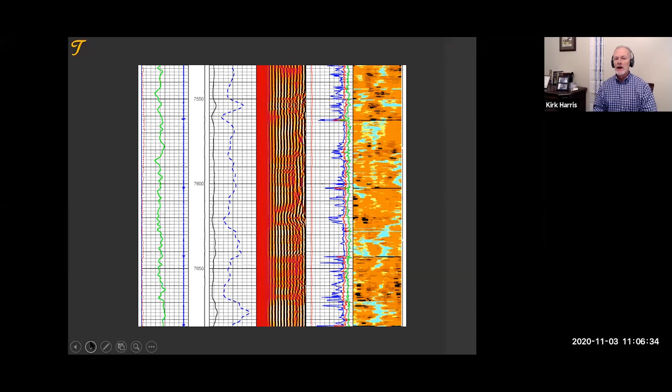We're going to talk about the bond log and the ultrasonic, both. We'll save the ultrasonic for next week. This is a combination bond log and ultrasonic. Bond log on the left, the colorful map we'll look at next week. We're going to focus on this, the CBL.

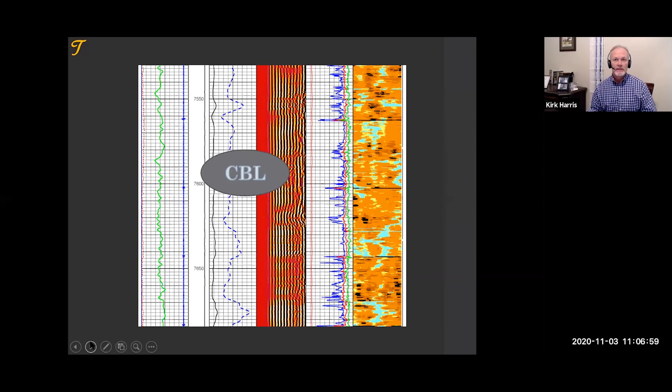And as you look at that, I don't know if this is your first webinar on bond logs or if you've attended others, but the bond log is a simple log. Five curves, easy to understand. To interpret them, we'll look at, is a little more tricky.

This is the purpose, this is the reason that we're learning about bond logs. Someday, if you're in upstream oil, you will find yourself gathered around a bond log. This happens to be a school I was teaching a few years ago in Colombia, but you will gather around the log with drilling, with production, with supervisors, with managers, engineers, geologists. Almost every position in the oil field upstream will touch that bond log.

As we abandon wells, I look at many bond logs to assure that we have a secure abandonment, a well that has integrity as we abandon the well using the bond log. So I hope that you get the opportunity to be gathered around the bond log and watch the dynamic that occurs, because people will be arguing, people will be talking, it will be noisy, and you may be in a position to be able to help interpret that log, or even to take a leadership role in being the go-to person for your company for bond logs.

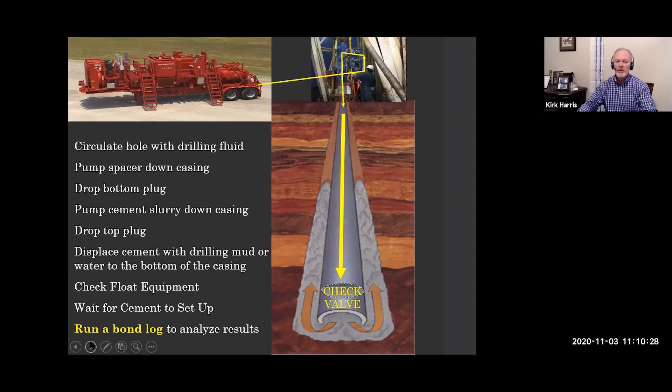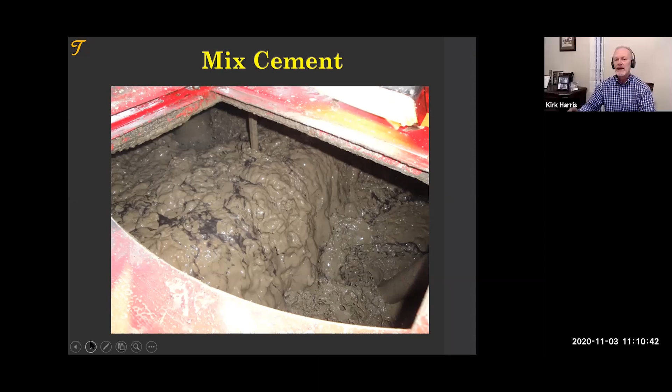At the bottom of the casing, there is a check valve. We call it float equipment to keep the cement from coming back inside the casing. We then wait for the cement to set up and run a bond log. So we mix the cement, beautiful gray cement. Here we're mixing it. It's being mixed on the left side of this tub, being poured over into the right side of the tub, where we'll then let it go to the high pressure pump and pump it down hole.

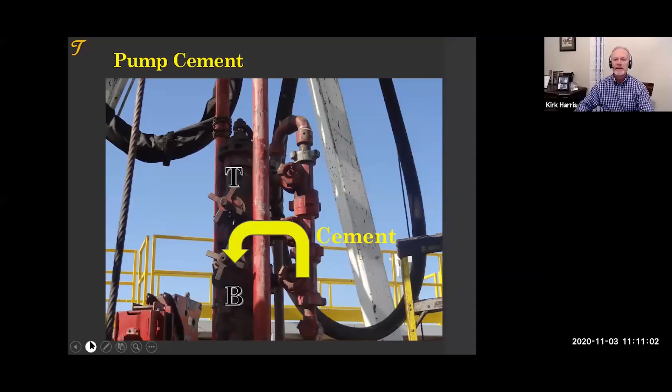On top of a bottom plug B, through a cementing head, we're going to pump that cement on top of that plug, then drop the top plug T on top of the cement and displace it with liquid. There we're taking returns, going down the casing, up the annulus.

What do we do next? What's the next thing we do? We've pumped the cement through the casing. Hopefully it's made it to the outside of the casing, has been lifted up, covering our zones to cause isolation so that the oil and gas doesn't come up to surface or come up to a previous or another formation, such as a freshwater formation.

What do we do next? One of the favorite things I like to do. We sit back, we relax, we pour our coffee, and we wait. We wait. While we wait, the cement is setting up. We're then getting ready to run the bond log. We're going to wait 24 to 48 hours for the bond log.

At the end of this session today, we're going to talk about some disasters that have occurred, including Macondo. And for Macondo, we did not run a bond log because if we were going to wait 24 hours, that's $500,000 of waiting time before we can run the bond log. So the bond log costs money, but the waiting costs money as well, as it is on the critical path sometimes. And so sometimes we have to design the cement to set up faster to be able to run a bond log sooner.

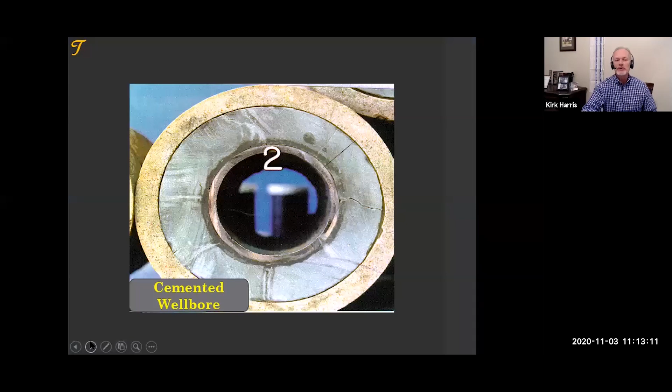And at the end, we have a cemented well bore. We have the formation, the cement fluid, which becomes part of the well bore. So let's look at the tool that we're going to run inside of this well bore.

And it's kind of interesting because I don't know if you've ever thought about it. Sometimes I think about things in the oil field that probably I shouldn't be thinking about or no one else thinks about. I imagine going down the well. Does anyone ever imagine that? That I'm going to take a trip down the well bore, a couple miles. Can you imagine how quiet it is down there if you're just sitting down there? I've been inside a cave before, only 100 feet into the cave, and it was dark and it was quiet.

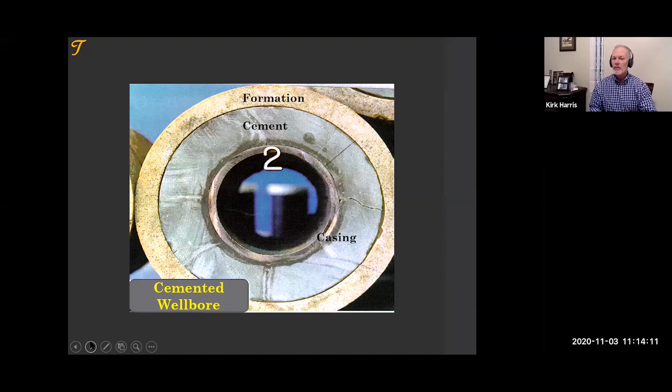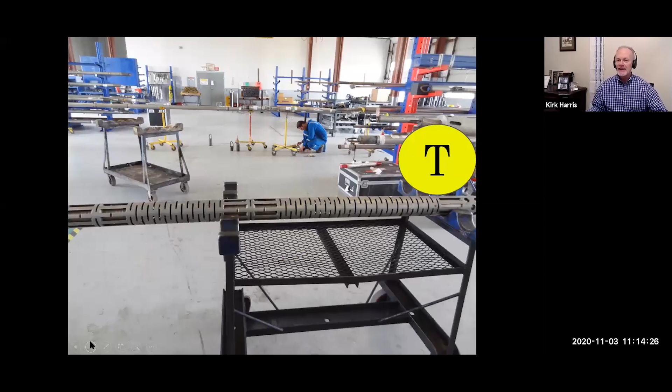Well, it's very quiet, and we're going to run a tool down there and start making some noise. And when we run that tool, this is the tool, we're going to make that noise with a transmitter for the bond log that is making an audible sound. The sound that it makes is a clicking sound. Very rapid. And we're listening for that sound 3 feet away and 5 feet away. And we're listening for how loud that sound is. And when do those sounds arrive? And after we hear the first sound, what other sounds are we hearing?

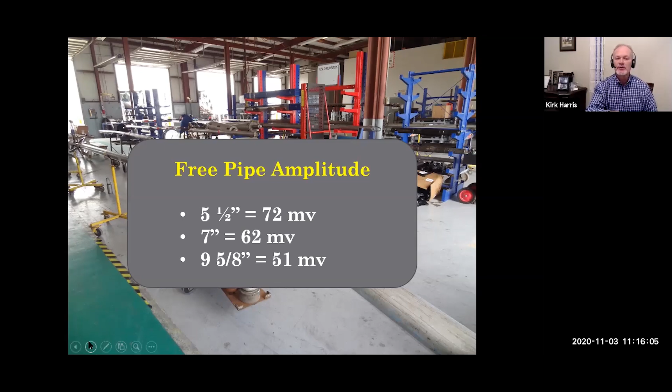Let me take a look back here. This is inside the shop of a logging company. And I've kind of hidden what I want to show you here, but behind this screen that you see is a test cell where we will run that tool that we just saw, and we will measure. Here we go. And we will measure how loud the tool is in there, and different companies do it differently. Some companies will run it in this chamber and they will just make sure that the tool is working, that it functions. Others will calibrate this tool and they will listen to see how loud it is in pipe that is not cemented. And we get various free pipe amplitudes when we sound that tool off.

The problem with the bond log tool, we go down the well, it's very quiet. We send out sound waves and we start listening for echoes. If we're in the open hole, no casing, no cement, open hole sonic logs, the sound goes out, it reflects off of the boundary, which is the formation, and comes back. We get a nice clean sound wave coming back.

When we put casing into the well bore, as the sound wave goes and it hits the casing, whatever's on the other side, if it's a solid, the sound wave passes through. But if it's liquid or it's poorly bonded, then it reflects back and starts to echo. So when you put casing in the well, it's like going into a tunnel that is made of a big piece of steel. You start shouting, you start getting echoes. And these echoes start reflecting and make the bond log a little confusing.

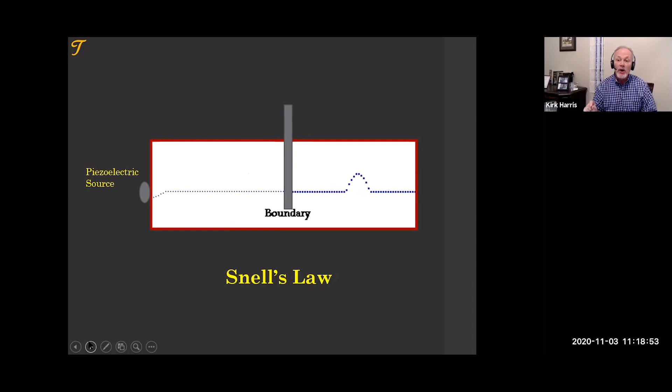So when I have loud ring or high amplitude or loud sounds coming down the casing, I have no cement. If it's a small sound, all of my energy has gone out. The small sound coming down the casing means I do have cement. So when I have cement, I send that sound wave out. It goes through the casing, through the cement, reflects off of the formation.

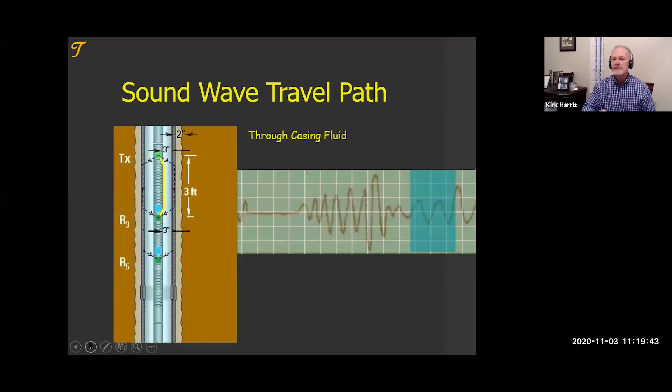Again, the first part of the sound wave that I sent out, that's going to arrive at the 3-foot receiver first. The first part of that wave is traveling through the casing. It's moving fast, so it arrives first. The second is going through the cement and formation. And the third part of the curve is coming down alongside the tool inside the logging fluid.

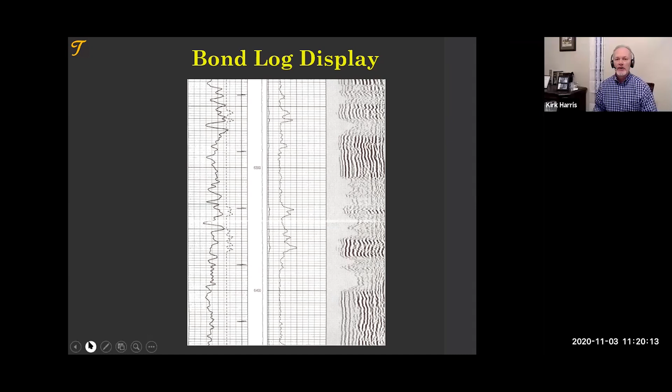The middle line there, the dark line, is the transit time. It is telling us from when I click, when I hit the transmitter, to when I receive the signal. This transmitter is being fed electricity through electric wire line. When the electricity hits the transducer, it causes the transducer to contract and sends out a pulse, 20 kilohertz in frequency, a sound that you can hear if you have good ears. And when it goes out, the time it takes to get to the 3-foot receiver is the transit time.

The casing collar locator is the hashed line. It tells us where the pipes are jointed together. It's that extra massive steel. It's basically a magnet telling us where the large steel volume is at the joints. The middle curve, and I will warn you, at Therabond, we are very hesitant to spend too much time looking at the amplitude curve. This is basically how loud is that sound, that first sound we hear at the 3-foot receiver coming through the casing. How loud is that?

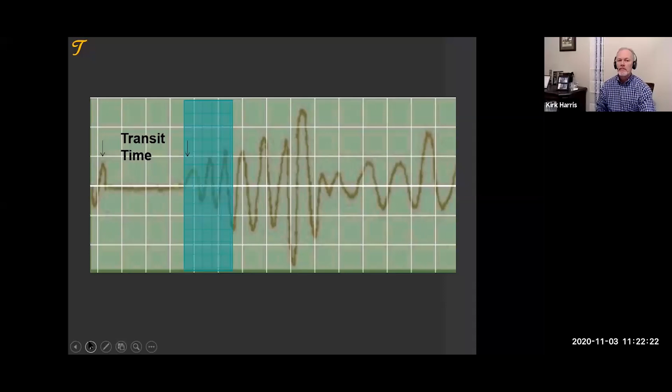And then we have the variable density log to the right. That's the 5th curve. That is the history of the sound wave. Time versus depth to when I receive it. The amplitude is the height or loudness of that first wave that arrives. In this case, it's fairly small. The big peaks coming later, those are big sounds reflecting off of the formation. But that first area is coming through the casing. That first peak is the amplitude.

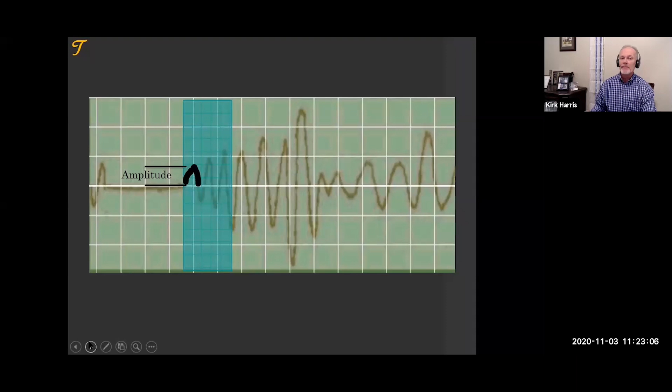I will repeat, at Therabond, we do not use amplitude specifically to interpret the log. We will read the log for the CBL. And we will be looking at several things on the variable density log that we will observe when we interpret the log. But we take the variable density log. I'll show you how we make it. We cut it in half. It's like being in the ocean at sea level and watching one wave go by. The height of that wave is the amplitude. We take that.

We're going to cut that wave in half, rise out of the ocean, and look down on that wave. And when we do, it would look like this. And now we'll do that as we go along the beach of the waves coming in. We will mark the peaks of all of those waves, and we will connect them to create the VDL. Again, it's like flying over the ocean now, looking up and down the beach, that's our depth, and looking at the first arrival that's hitting the receiver, a history of the waves that are about to come in and be picked up on that receiver. So every time you fly over the beach, you're looking at a VDL.

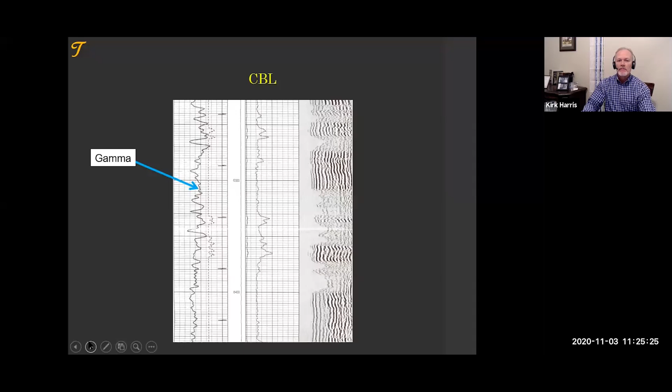When we look at the CBL, we'll see it to the far right, 5 curves. You get the gamma, the dotted line in the middle is the transit time, 3-foot receiver. The hashed line is the casing collar locator. The middle area, we have 2 curves. They're the same curve, different scales. This is measured in electrical energy.

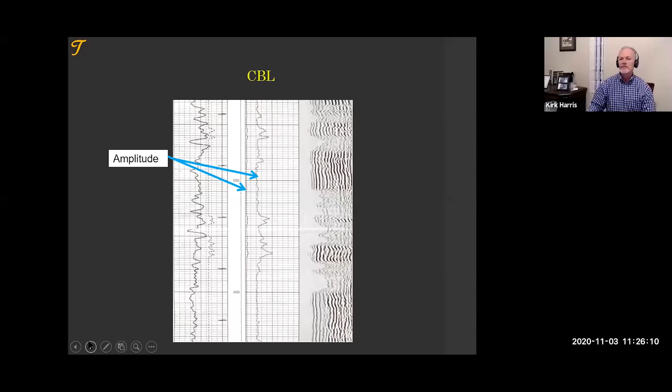It's the amplitude. This particular log, and it changes from log to log, this particular log from 0 to 100 millivolts. And then we have another curve, the amplified amplitude, 0 to 10 millivolts. And then we have the VDL, the variable density log. And that's where we'll have our focus when we interpret our bond log.

When we look at that, the first part of the wave, the first wave hitting the beach, is the fastest sound and that fastest path, and that fastest path is traveling down the casing. In this area, we look for straight lines because it would be a lot of energy, and since it's coming down the casing, it's homogeneous.

Always, if our tool is centralized, we get the same fluid, the same casing, the same fluid. The wave should arrive at the same time up and down the well, and we'll see straight lines. In this case, it's a perfectly cemented well, so the lines disappear. There are no straight lines. And a basic rule, if you see straight lines, that's bad.

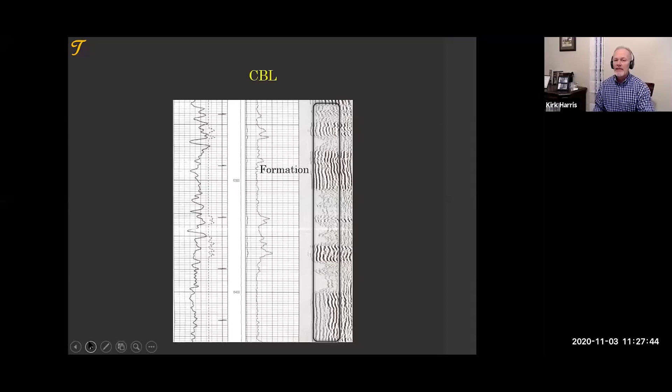Straight lines are energy coming down the casing. Straight lines are the same as a loud casing ring. When you see no lines, the energy is so small we can barely pick it up because it's very quiet sound. The middle part of the curve comes through the formation, big formation signals. And then the last part, we'll see effects coming through the fluid. All of these waves coming in, and the construction and destruction of these waves as they come in show up

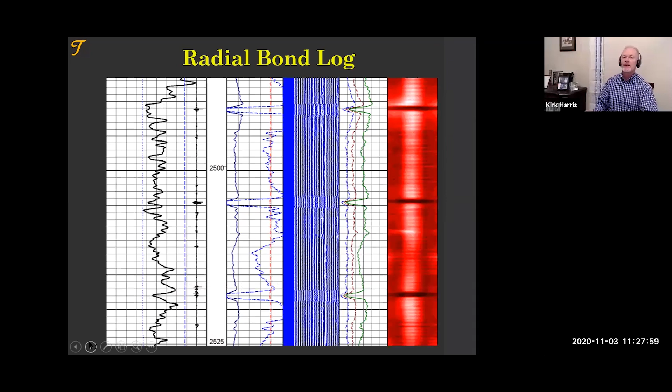in the VDL. Very quickly, you're going to see some colored maps today, and those are from radial bond logs, where we have the regular cement bond log, 5 curves. We add to that a cement map. That's based on 8 separate receivers, either at the 2-foot or 3-foot interval. By the way, the VDL comes from the 5-foot receiver that we saw earlier. The cement map will come from radial receivers listening on each side of the casing at the 2 or 3-foot interval.

When we come to look at the bond log, the key thing, and I see people who have talent at this, and I see people who do not, and that is we have to learn to observe. To observe, you need to use your eyes. You need to quiet the rest of your senses.

I can observe and taste coffee at the same time, so I think that's okay. But I actually usually taste the coffee first and then observe.

I want you to see with the eyes. If you're talking, it's hard to observe. If you're in a hurry, it's hard to observe. If you don't know what to observe, it's hard to observe. So I want to take you through the things that we will observe. There are 4 main things we'll observe when we look at the bond log immediately. The first thing we will observe is casing ring. Casing ring shows up on the VDL as straight lines.

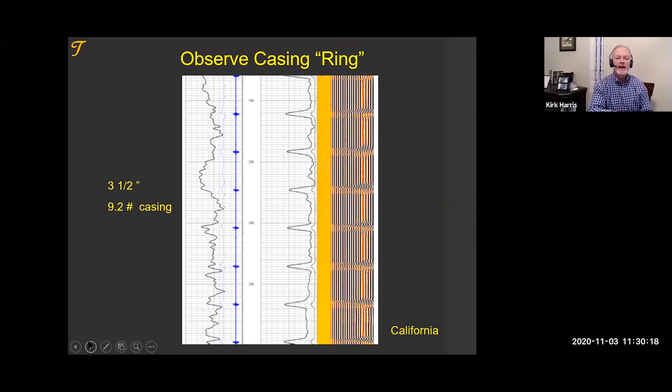Do you see any straight lines on the VDL, the curve on the far right? A lot of them. Matter of fact, if that VDL was this glass, not only do you hear a first ring, you hear it resonating, big ring all the way throughout. There is no cement. So we observe the casing ring. Look at these logs. The log on the left, do you see straight lines? Do you see casing ring? Especially first arrival casing ring. We do. We also see the big chevron patterns at the collars.

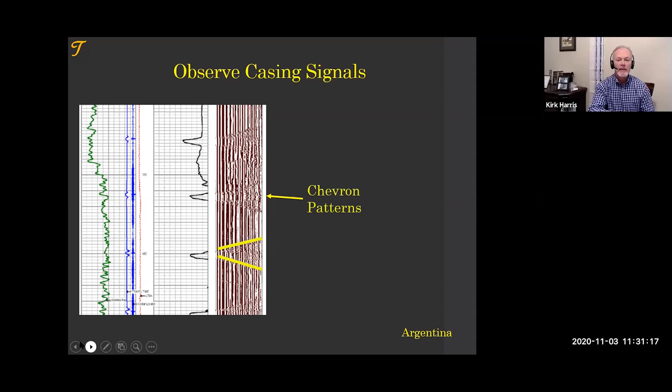When you see straight lines, first arrival, that's bad. At least it's going to require some interpretation. If you see no straight lines, then you don't worry about it, or many don't. Maybe we should sometimes, but I never receive logs that have no straight lines. They don't send those to me. I only see the ones with straight lines that cause problems. They go away. The next thing we will look for are formation signals.

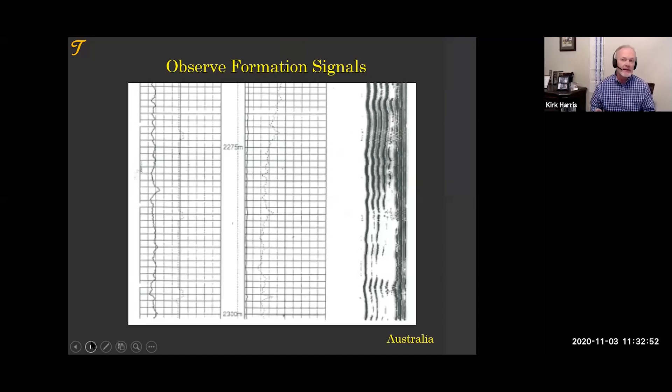First of all, do you see any straight lines in this log? You see some to the far right. Those are fluid arrivals. But to the left, here in the VDL, all of the straight lines disappear. That's good. But we want to make sure we're connected to the formation, and they will show up as these big, crooked, squiggly lines. So very basically, straight lines are bad, squiggly lines are good. We're connected to the formation, we're reflecting off of the formation. We must be connected by cement.

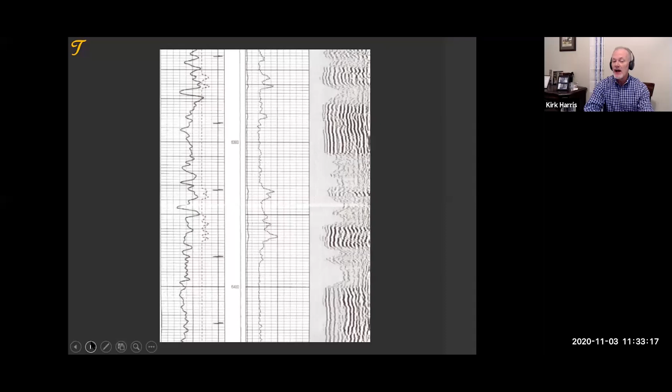Do you see any formation signals here? Do you see any straight lines here? No straight lines, but look at all of the crooked lines or the bending lines. Those are all strong formation signals. It's a perfect cement job.

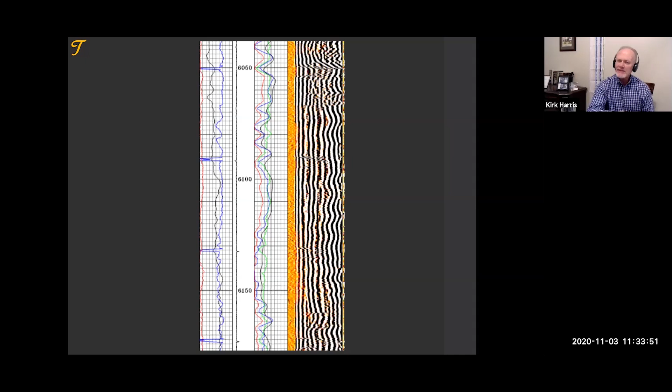What about here? Straight lines, do you see any? Just look at the VDL. Do you see any chevron patterns at the collars? I do see straight lines. I do see chevron patterns. But do you see any formation signals? Look at them, strong formation signals. We must be connected to the formation. That is a very good sign.

The third thing we'll observe, the first we look for casing rings, second formation signals. Casing ring is straight lines. Formation signals are crooked lines. Look at this log. Do you see straight lines?

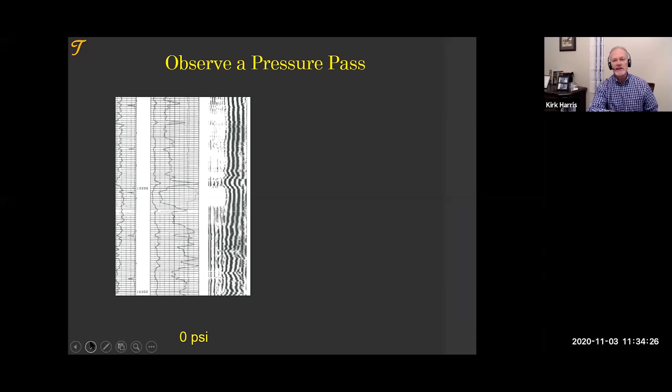A little bit in the bottom. Do you see formation signals? I do. Strong crooked lines that follow the straight lines. If we can apply pressure to the casing, which we do here, we place 1,000 psi inside the casing, it expands the casing, it strengthens the bond, and the straight lines go away. So if we do have a pressure pass, then it can give us some good information.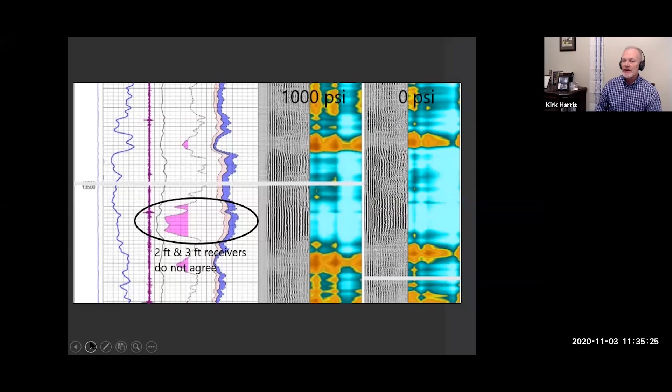And the final observation I will look at: I get the log, I look for straight lines, casing ring. I look for crooked lines, formation signals. I see if there's a pressure pass, and I observe the pressure pass if anything has changed. And then I look for top of cement. Where does it go from no straight lines to very big straight lines? And I try to find the top of cement. I will use that top of cement so I can compare and analyze the rest of the log.

Results. As a matter of fact, we will talk in just a moment, but when you cement an oil and gas well, for the most part, these are your only 4 options. These are the only 4 things that can happen when you interpret a log. They happen in different ways. Different mechanisms cause it, but you either have no cement, debonded cement, we might call that a microannulus, or the cement has channels in it, either mud channels or gas channels, or it's a good cement job, perfectly tightly sealed. Let's look at what each of those looks like.

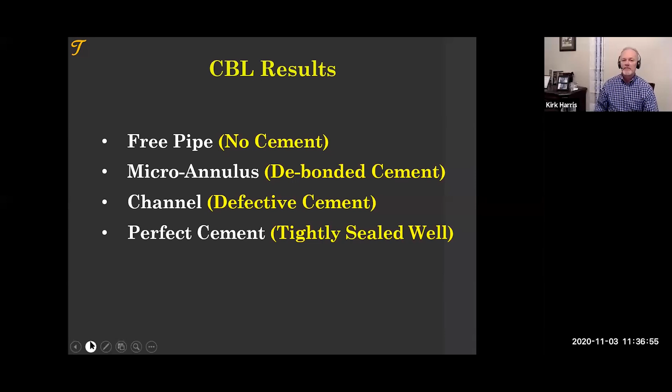This one's pretty evident. A lot of straight lines. If you look at the CCL, and again, you'll have these charts. Here's our CCL, our casing collar locator, transit time dotted in here. Here we have our gamma ray. We actually are showing here 2 transit times. It may be the 3 and 5 foot receiver. Here's our amplitude. Here's our VDL, and this is our cement map. Straight lines, no cement, big chevron patterns. This is free pipe, what it will look like. Straight lines, chevron patterns, strong chevron patterns.

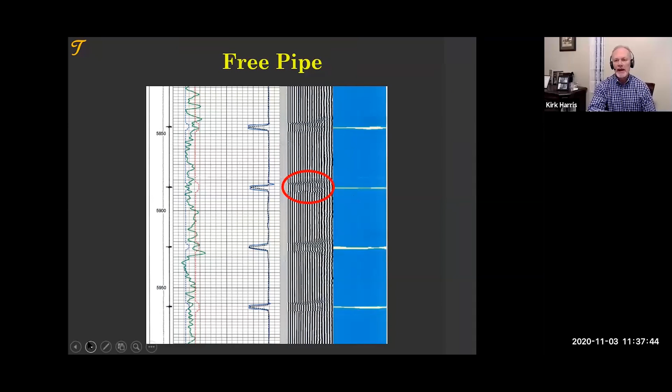Here's what a channel might look like. The unfortunate thing is that a channel often looks like debonded cement. And on the 3rd week, we'll talk about some more advanced techniques to determine the difference between a channel and poor bonding. But once again, you get straight lines with the channel. We get the collars. They're dampened somewhat, but they're pretty strong. And you get formation signals where it's attached. On the cement map, because a CBL cannot detect channels on its own, not clearly, but we see the channel coming from this water zone that we know is flowing. This is a big channel. When we look at the ultrasonics, we're able to see smaller channels.

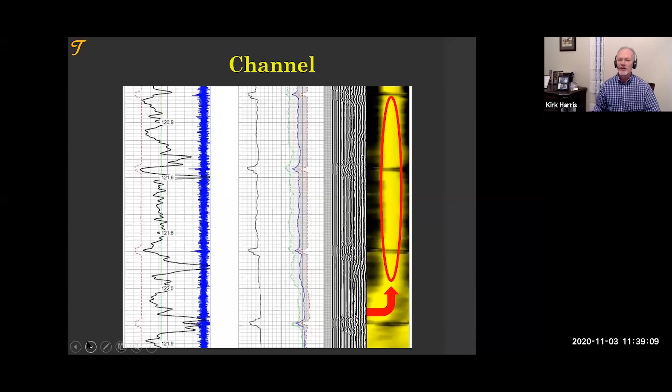We can get these kind of cement jobs everywhere. We can. In the most difficult of circumstances, we can get a great cement job. But we have to be ready to do some serious cementing. Sometimes we have to be aggressive. We have to understand the entire wellbore, but we can get these kind of results. What about this one? Do you like this one? Why do you not like it? I mean, I don't like it.

Because we see straight lines. Many will say, I don't like it because the amplitude here is 72 millivolts, which happens to be the free pipe amplitude for 5.5-inch casing. So the amplitude says I have free pipe. The straight lines say I have free pipe. The collars start to get dampened, and then we see what appears to be formation signals. Or are they? What are those squiggly lines?

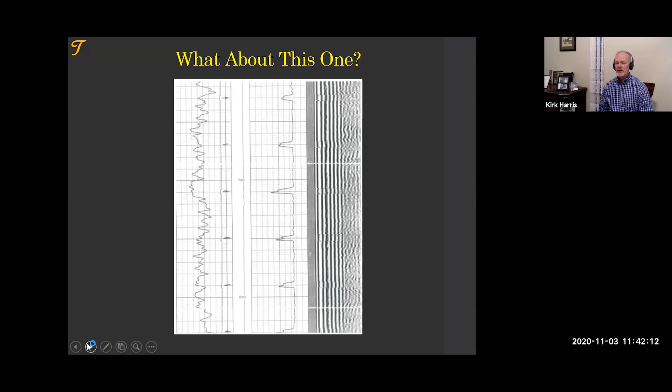Here's another observation. How many straight lines do you see before the squiggly lines? And does it change? Count them. 1, 2, 3, 4, 5, 6, 7. There are 7 straight lines before the squigglies start. And notice, it all happens right at the same point. This is an indication, and it's something we observe.

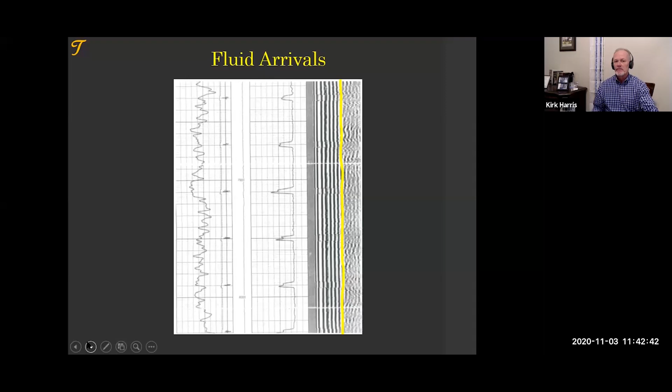These are fluid arrivals coming down the casing, distorting the straight lines. These formations, although we may be seeing some effect if the casing comes over to the side and touches the formation, what we're seeing here are fluid arrivals. This happens to be free pipe, no cement. So these are the things that we will observe.

Now that we have kind of the basics, what is the method? How do we interpret bond logs? We call it the 5 C's. Some of you may have joined or have seen our 5 C's before. You will know what we're getting ready to look at. We're going to construct the well first. What I mean is, although I love the bond log, I'm not going to trust the bond log. I'm going to trust the cementing operation.

In other words, if I pump cement and cement came all the way to surface and I saw the cement at surface and the bond log says there is no cement in the well, I'm going to doubt the bond log. I'm going to trust the well construction first and foremost. In other words, I'm going to allow the wellbore to interpret the log before the log interprets the wellbore. And if you're not thinking about the wellbore, if you're thinking just about the log, you will misinterpret the log. So I'm going to kind of build the well as best I can.

I'm then going to look up and down and compare sections of that log. When I do that, I've already allowed the wellbore to interpret the log. Now I'm going to look up and down, and I'm going to let the log interpret the log. I'm not going to look for absolute numbers as much as a comparison of what parts of the log look like. And I do that by just looking up and down.

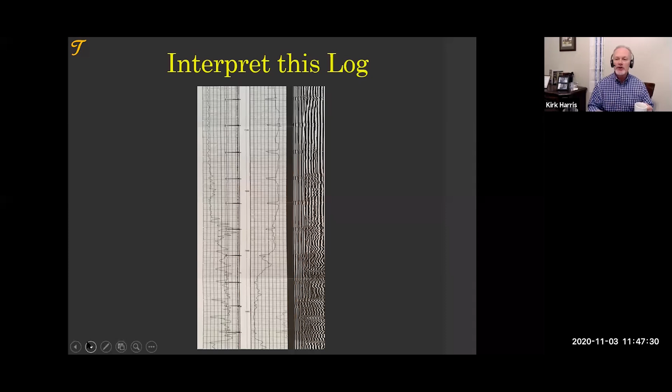And so I try to quiet them down because they take the log, and here it is, and they say, let's interpret this log. I said, okay, let me get my coffee. Well, Kirk, we don't have time for coffee. We've already interpreted it. All we did was we drew a line on the amplitude curve. And you can see at the bottom, it's good. Everything's to the left for the most part. But at the top, it's bad. Everything to the right. And so we finished interpreting.

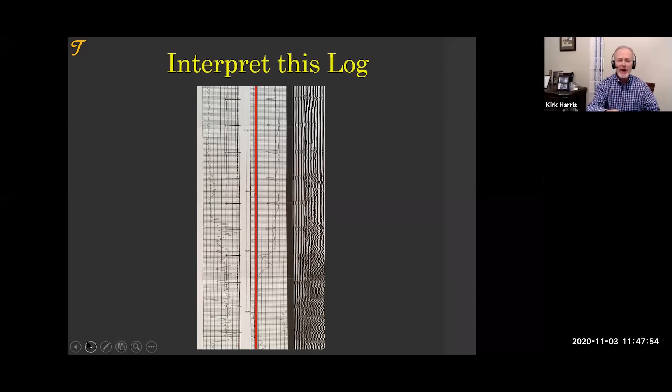And I say, well, wait a second. Let's have some coffee first. Thank you. Now we can interpret. And I do the interpretation by asking 4 questions. This is how I start. I ask the 4 questions, first of all, to quiet the room, because someone's already got the interpretation, and that interpretation is wrong. And so I have to get them back to the base of, hey, where was the cement supposed to be, by the way?

And then suddenly someone says, oh, well, I don't know. Has anyone looked at that? I guess we are talking about cement. Was there a lead and tail? Did we have losses or flows? Maybe we put all the cement in there and it all flowed out. I don't know. What do we know about the construction of this well? Do we have a weak casing to cement bond?

Someone will say, well, what has that got to do with the problem? And I will say, it's everything. The bond for a bond log interpreter is everything. 80% of all logs are affected by shear bond.

Just want to take a quick diversion here. I don't know if any of you have climbed poles recently. When you get to my age, your pole climbing days are long gone. They're over. I tried to climb a pole about 10 years ago, and I jumped onto the pole, but all I could do was just hang on for dear life. And so if you're young and you like to climb poles, just do it now. Later, it's not going to be pretty.

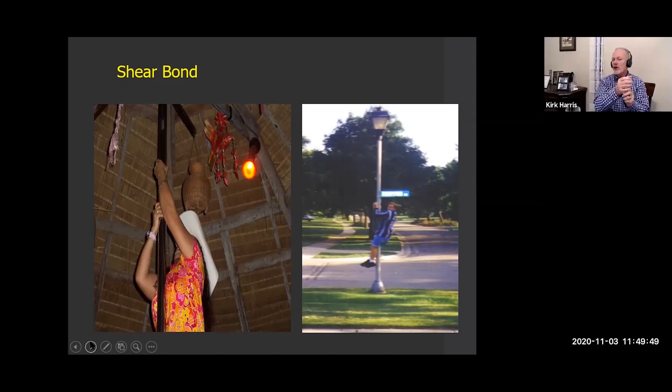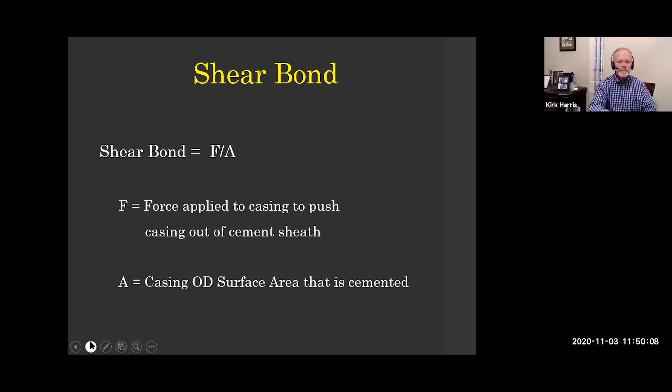When you're hanging on that pole, your weight pulling you down divided by the area that your hands are holding on to, that's shear bond. It is the force applied to push casing out of the cement surrounding it. Shear bond, very important. So I asked, do we have a weak casing to cement bond? Maybe it's low shear bond.

And then the fourth question, and if you don't know a geologist, you need to get to know one because the formations have a huge effect in bond logs. I asked which formation is causing the problem. So first we construct the well bore. I want to know about the very simple terms. I want to know where is lead cement and where is tail cement.

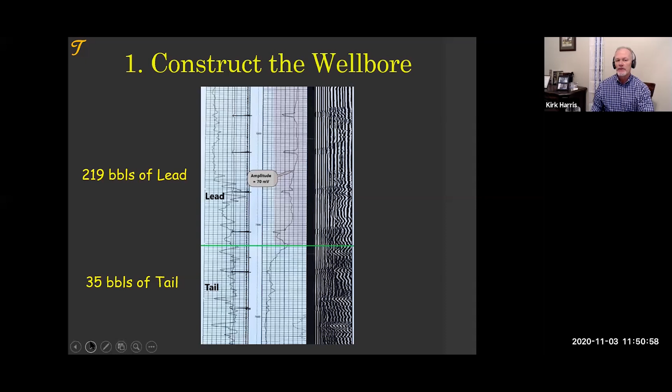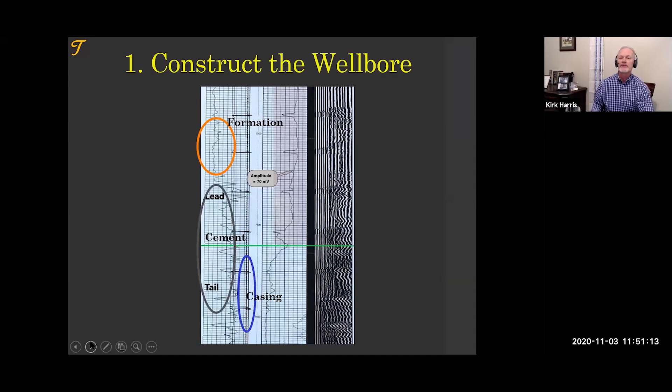This looks like free pipe. It was interpreted by a major logging company on location as free pipe when it actually was the lead cement. And we need to be able to interpret that. We look at the cement, we look at the casing, we look at the formations when we construct the well. Sometimes you have a lot of data, sometimes you don't. The more data you have about the cement job, the better the interpretation will be.

Then we compare log sections. You can look and see the difference between the top and the bottom of this log. And I put there's my lead cement. That was interpreted as no cement, but it is lead cement. And then I take that lead cement and I compare it to what is free pipe.

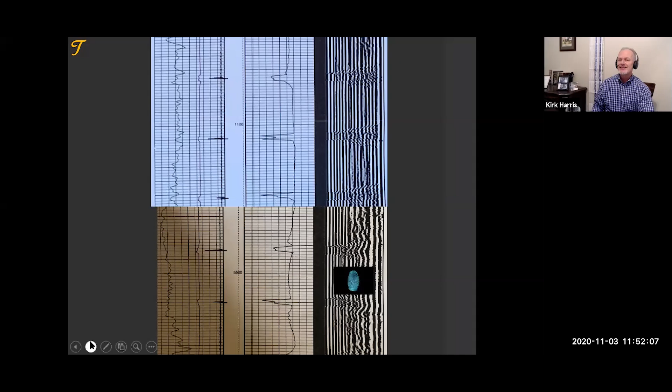I'm comparing, and you can see the difference between my thumbprint on that VDL and the free pipe interval above. What is below was not free pipe. Although look at the amplitude. The amplitude is the same. And then I correlate at changes. Straight lines bad, crooked lines good, and I get good, bad, good.

When I correlate, I just draw at the points of change. I draw a line over and correlate to the bottom and to the top. And now your job as an interpreter, as a detective into this log, is to determine why did it go from good to bad. There's got to be a reason. Your job as an interpreter is to do that.

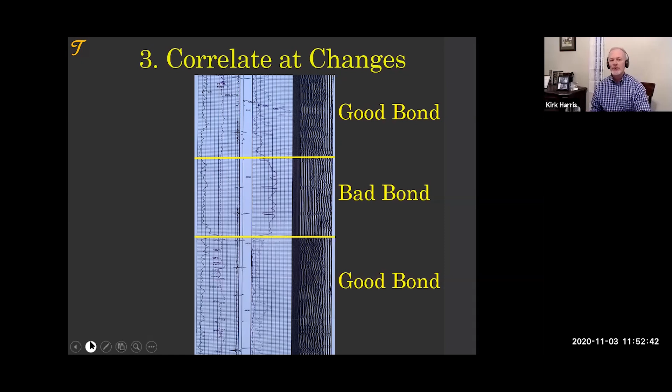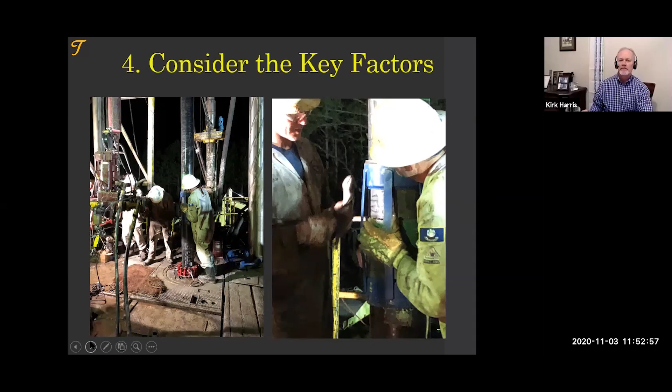Step 4 is to consider the key factors, things we're doing on location. Here we're running casing, we're centralizing. What things are we doing on location that will affect the bond log? I'll give you a few examples. There are 35, and we'll dive into those in week 3.

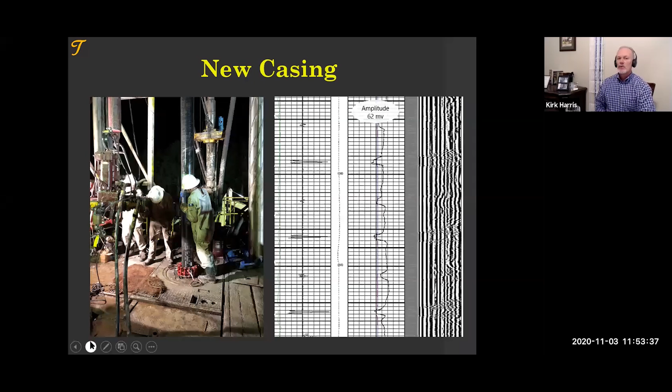The first is new casing. This casing from Argentina was shipped and run in the Middle East, showing free pipe amplitude, a lot of straight lines, that's bad. Some crooked lines, that's good. But it's showing a bad cement job, and it's brand new casing causing the problem. We sandblast that casing, we take off all the pretty paint and shine, and you see the straight lines in those sandblasted joints disappear.

Considering the key factors, centralization. You can look at the log and see the line in that colorful map. It's because that particular casing was not centralized. So we like to look for where the casing is centralized.

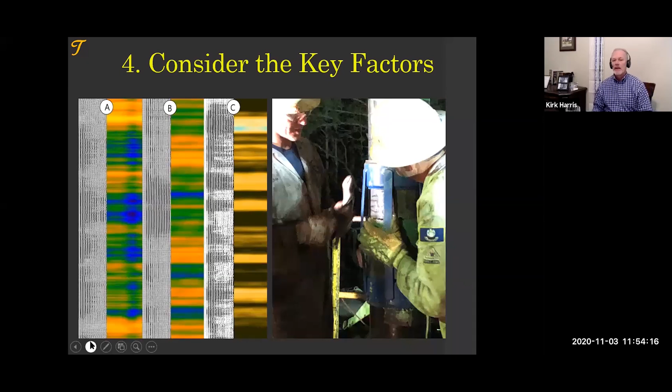Lightweight cements. Look at the straight lines in the upper portion of this log and watch those straight lines disappear. Both have crooked lines, but the upper one is being hidden by the straight lines. The shear bond of the cement in the upper is only 50 psi. It's 200 psi below. We find that we need about 150 psi of shear bond to get those lines to disappear. So lightweight cements we must consider.

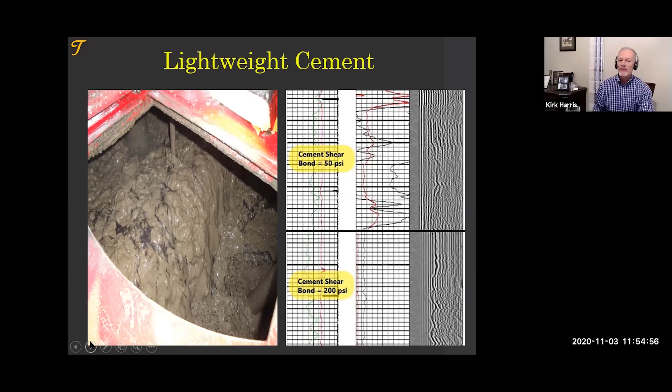Here's our lightweight cement. In 24 hours, we only get 260 psi. That's so low, it doesn't want to log very well. It can provide isolation, but it doesn't log.

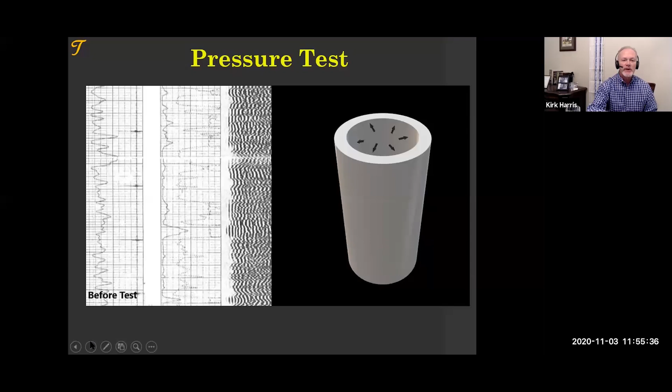Another consideration, pressure test. When we cement the well and before we test the casing, look at all of the crooked lines. Once again, looking at the bond log, we have the gamma, we have the transit time you can barely see, casing collar locator, low amplitudes for the most. Then 1000 psi, and we break the bonds. So pressure testing we have to consider when we interpret a bond log.

I see this on so many logs. We cement the well, we wait 48 hours, we pressure test the casing, we break the bonds, we run the bond log, and we are confused.

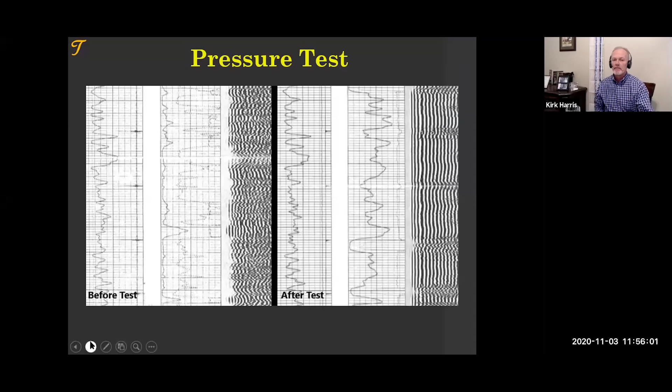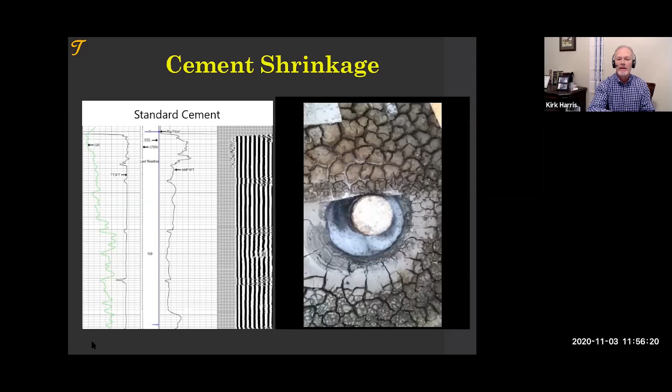A final one here is cement shrinkage. When you have cement shrinkage, sometimes you also have gas bubbling. The cement shrinks away from the casing and the bubbles come up. That's a big problem. So we sandblast the casing so the cement will lock into the grooves, and we add an expansion additive which tightens the bond. The cement expands and presses against that casing. Not only do the straight lines disappear, but we find the gas percolating also disappears.

And finally, we conclude, not only do we have zonal isolation, not only good or bad, but why or why not? Why do we have zonal isolation? What do we see on the log? Or why not? What's going on? That's what we want to do in interpretation.

And when it comes to cementing, you only get 5 choices. There are 2 good choices. We either have good cement or shale. We either have cement providing isolation, or we have a geologic barrier that has come in and provided isolation. Do we have isolation or not? I don't know, because we may have a weak bond, and that weak bond may be enough to have isolation, or especially with gas wells, it does not.

And then when it comes to no cement, you only have 2 choices. It's either no cement at all, or it is a channeling issue. Cross flow wiping out the cement would be part of a channeling issue. So these are the choices we get in concluding.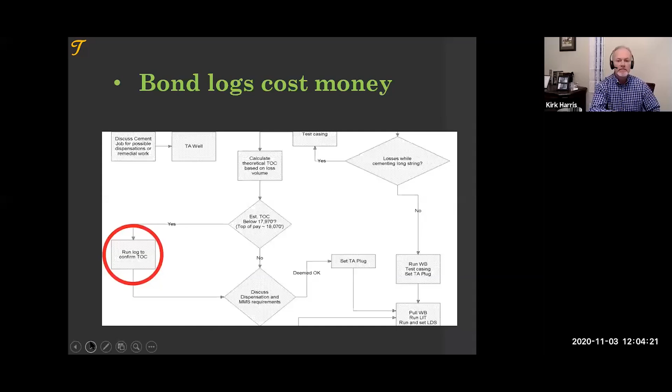So let's start closing the session with interpreting a log. And I want to show you the importance of the bond log and how we would interpret it. If you've attended any of the sessions before on basic logs, you may have seen a log like this. How do we interpret it? What's the first thing we do when the log's set before us?

I actually just received a fresh cup of coffee. So when you think about the 5 C's, never forget the 6th C. Keeps us relaxed, reminds us we're going to observe and follow a procedure.

For me, this is not just theory. I interpret logs every day, and I use the C's. I always have the 6th C, coffee, with me, but I use the 5 C's every day. This is not theory. It's simple, but it sets in motion the way we should interpret logs. You will want to just go in and say, it's bad cement. There's a middle section in here that's bad cement. I know at least it looks bad, but is it really bad? More importantly, why? You have to understand the whys. And I'm going to show you a good reason for that as we close out today.

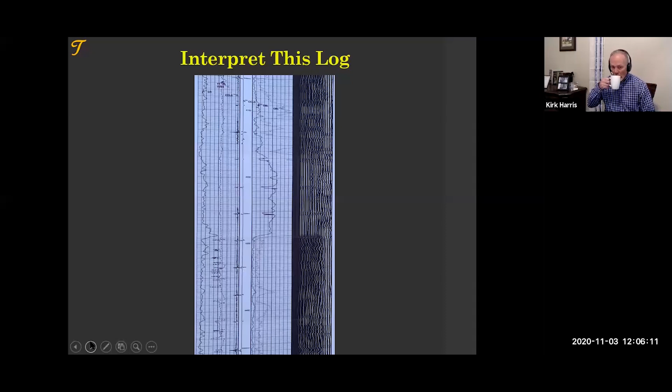We're going to construct the well. For the purposes of this interpretation, I go and I ask the questions. Where was the cement supposed to be? In this well, it's supposed to be way up the well. This is just a short section at the bottom of the well. Is there a lead and a tail? Yes, there is a lead and a tail, but the lead should be way up the well. This should all be very strong tail cement.

Okay. I then ask about things like, did I have losses or flows? I asked the drilling engineer, he said, no losses, no flows. Perfect cement job. Like Macondo, quote, a perfect cement job. Okay, maybe I don't even need to run a bond log if it was a perfect cement job. But we ran a bond log, and I'm glad we did, because we find a section in this casing that doesn't look good. Let me correlate.

First, I compare. I look up and down. Let me go back to my construction. My third question is, maybe there's a bonding issue. My first thought, if there is a bonding issue, I've got good bond below, good bond above. It's just poor bonding in an area. Maybe it's new casing. It's not a pressure test, or that would have broken all of the bond. What could it be? Maybe 3 joints of casing are new. Maybe there's something with the casing. Maybe, I don't know. And I ask that question. I also ask about formations.

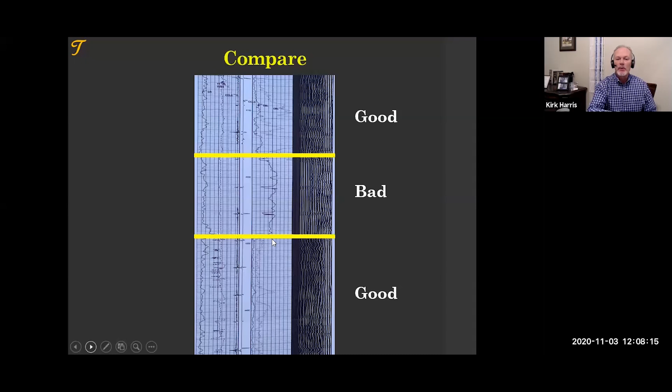But then I compare and we look at it. I compare these 3 sections looking up and down, and at the point of change, I need to correlate. Why does it go from good to bad? I cannot just say good and bad. I have to explain what's going on as an interpreter. A logging engineer might say, hey, look, it's bad. I say there's not much cement there. And I would say, why? He said, that's not my job. It's not my job to tell you why. I'm just running the log and telling you what the log is saying.

I want to know what the wellbore is saying, not necessarily just what the log is saying. So I'm going to correlate back to the wellbore. And I happen to correlate right to this point. You see the gamma spike? That's our formation. The casing collars are our casing. The cement is all one cement, so that shouldn't change. I don't change near a collar, but I change right at the gamma. There it is. When you start correlating, the puzzle starts to be solved.

Next week, we're going to look at this log. This log is an ultrasonic log, and we'll look at this in depth. But look at this. I'm considering things, and one of the things I always consider, maybe it's poor bonding. Maybe there are joints of casing that aren't bonding as well. But when I look at this, I can see that the occurrence is not happening at a collar, it's happening at the gamma.

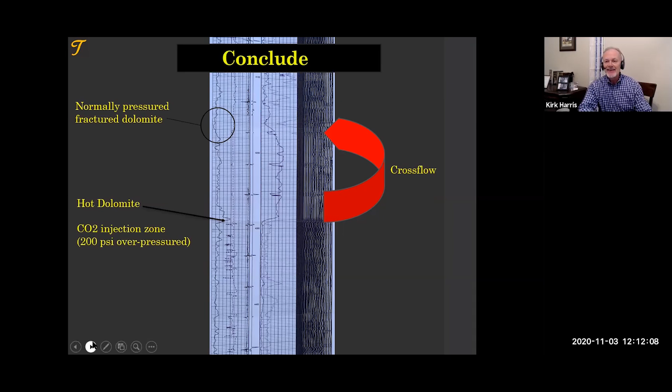So the bond log not only told us that the perfect cement job was not perfect, it told us how to fix it, and it told us how to cement wells in the future. This tool, the bond log, is extremely useful.

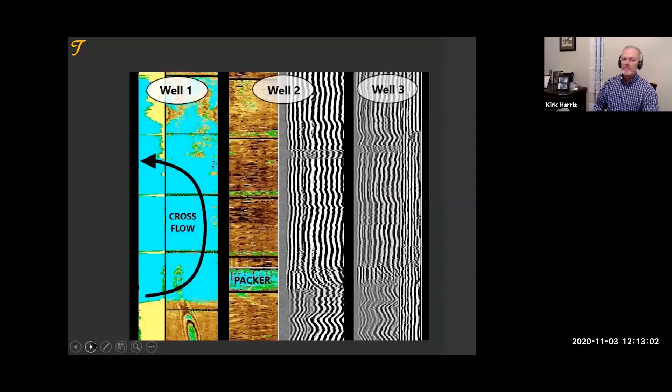I would like to close with a few simple things in our summary. First of all, cement logs are simple. We've got the gamma, transit time, casing collar locator. Those are on one side. We've got the amplitude in the middle. And it's not that I don't like amplitude, but we cannot draw a straight line and say that interpreting is just left and right of a straight line.

Amplitudes will fool you mainly because of the poor bonding that can occur for a number of reasons, and we still have isolation. As an example, every lightweight cement is going to fail the straight line test, the amplitude test. We use the VDL, not the amplitude.

Cement logs are simple, but good interpreters must practice. You must practice observation. You must understand the logging tools. I think if you don't understand the logging tools, you'll trust them too much, but you have to understand the logging tools, and you have to know cementing. You have to know the wellbore. You'd better have a geologist nearby. The geologist is usually the go-to person because they work with logs and they know the formations.

But you must practice. The things we talked about today, you will forget in about 2 or 3 days if you don't get in front of a log and practice. Finally, bond logs are very useful. They're going to help us to fix wells, help us to cement better, help us to understand where production is coming from. If our wellbore is the best it can be, they're going to help us abandon wells and make sure that we have them properly sealed.